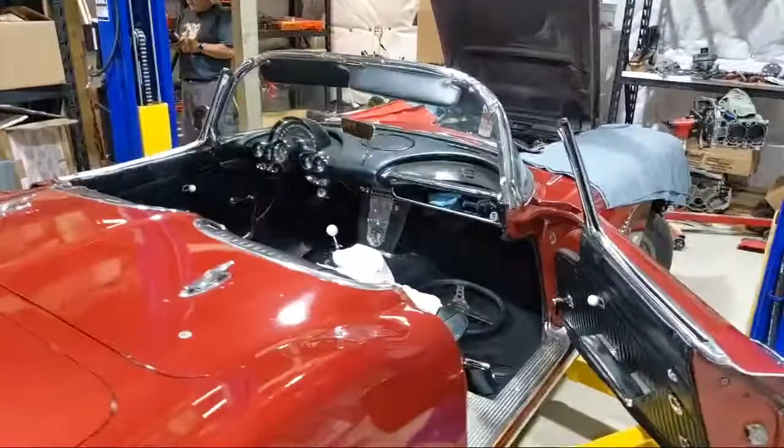So I got my dad's '62 Corvette here. I think it's actually technically his cousin's Corvette that he's been working on for a long time. It had been sitting in a garage for too long, and some people who worked on it before honestly didn't know what they were doing. So Dad's been trying to take good care of it.

It needs wheels and tires. Tires are new, but the old wheels from this era are pretty ugly. But I mean, that's just what they are, right? They're the magnesium ones, but they're fucking 14s. Look at these little 14s, teeny little guys.

So he sanded it down and repainted it, but it was his first time painting a car, so I think he did a pretty good job. He's got some dirt and stuff from doing it in his garage here and there, but overall it's pretty good.

It needs a little more wet sanding in some areas, but you should have seen it before—it's way better. Matt does all the body work, so Matt could help, especially with the finish work. It's got some greasy fingerprints on it from pushing it around.

Anyway, Dad did the interior, put new leather in the seats and the cards and all that stuff. He's worked on the cluster some because some of the stuff doesn't work. I don't think it's all quite right yet, but I know he's still working on that. I think there's the old dash-mounted mirror on these things.

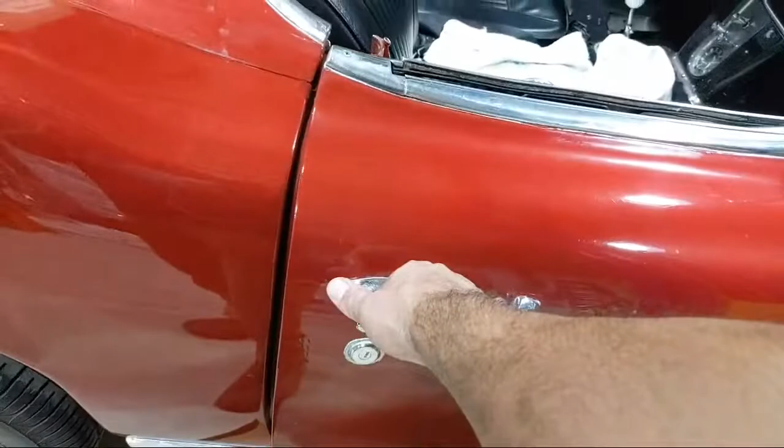Right there, it's really close to the exact points where the door is mounted, and even though the door closes, it still flexes so much that it won't shut. It has to actually get pushed down on it.

So the weight of the engine on the nose of this thing is bending the frame of the car in like a bow. Pretty interesting.

But let me tell you, that nice blue picture—there you go, how's that? How's the view, guys? The steering in these things is actually pretty freaking scary.

Or by somebody else that worked on it, but the lowest part of the car was the tie rods, and it was the lowest part of the car by a lot, and it was really scary.

Long, skinny, pencil-y tie rods that went to these skinniest little uprights, or hubs as some people call them, or spindles, and other terms.

Let me see if I can show you. Oh, look how skinny those things are. That's the spindle—look at that thing, it's so small. For comparison, here's my finger—I'm touching it. That's how small these uprights are.

Anyway, the tie rods were trailing, so we'll put this around here for you. It's pretty easy, no tie rods on it—that's the arm. Look how low this thing is. This is, and they put it on the bottom. I don't know if they did it wrong or if it's supposed to be on the bottom.

To measure the diameter of these holes and see if the taper was correct—judging by how hard it was to get out, it was either really, really wrong or it was freaking correct. But they hung from the bottom like this much further and went across the car. I can't see that being on purpose, but I've been wrong before.

It was the 50s when this was designed, right? This is a '62, so they were definitely working on it in the 50s. It's the last year of the C1, so again, the original engineering for this was done in the 50s.

Yeah, a lot of it's pretty scary, honestly. I'm surprised people didn't die in these things.

But look how long the lower control arm is—I think that's really cool, actually. The lower control arm is really long, and they mount really close to the center of the car. See that? And that's good for geometry. This thing technically has good parts in it for geometry.

The only issue with that is the upper arm is pretty short in relation to the lower arm. But if both arms could have been longer like this—look how long that is—obviously if the front arm were that long, it'd run into the engine almost.

This Corvette, being older, has most of the engine behind the front axle, not the front spindle here. That actually helps the weight distribution. See this one here? It looks even better, it's behind the front axle as well, better for weight distribution.

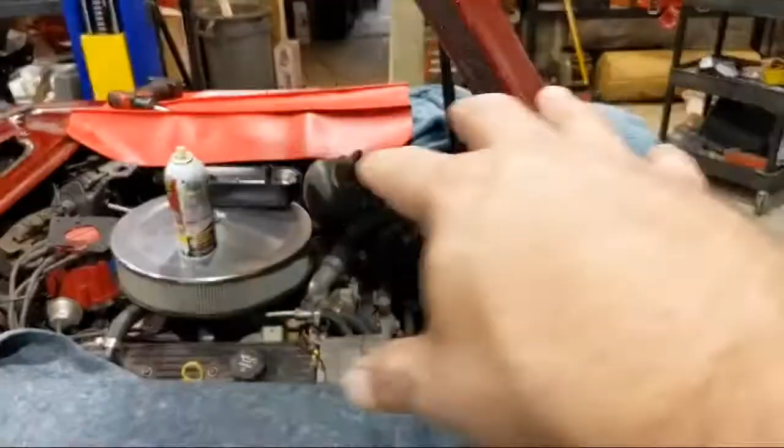I just had a conversation with a guy about Audis, how the entire engine in an Audi is in front of the front axle, and they're so bad. If you look at a 60-40 weight distribution, an S5, RS4, whatever, the entire engine's in front of the front axle. That's crazy.

Anyway, so what are we doing? We pulled all that crap out because we're putting power steering in it. The manual steering was, well, it was manual steering, right? This long ass setup is no good, a long shaft with a steering box on the end of it, and all those whack tie rods to the front end, like most manual steering cars, very difficult to turn in a parking lot.

Well, I'm half my dad, and he's got more muscles than I do. So if he had a hard time with it, then I don't know if it's something I would want to drive either.

Anyway, it's got a crate motor in it, a little small block crate motor. I think it's a 383 or something. Is that what you said? 350, it's just a 350. Oh okay, I thought you said it was something else. All right, so it's a little 350, no big deal.

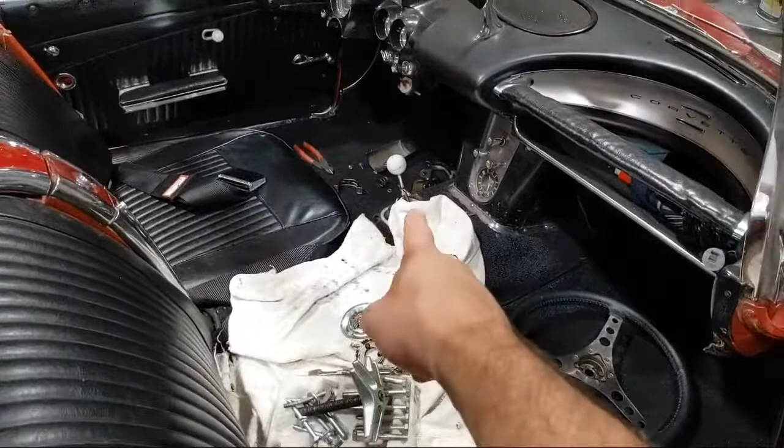It's mostly original though, obviously not that engine. But the transmission is the teeniest little transmission. The linkage actually broke off or unbolted itself from the side of the transmission, so thankfully he didn't drive it here. His original plan was to drive it here, and then as he was getting it in the trailer it started shifting funny. Then he got it out of the trailer and it got stuck in two gears at once, a forward gear and a backward gear, and then it only had five reverses. It was all whack. So we got it on the lift, picked it up, and looked underneath, and the linkage had completely come off the side of the transmission.

So fun. Anyway, what we're doing again is power steering this thing. Power steering, you've got a pump, lines, a new column, not a mile long either like the other one, and then a rack.

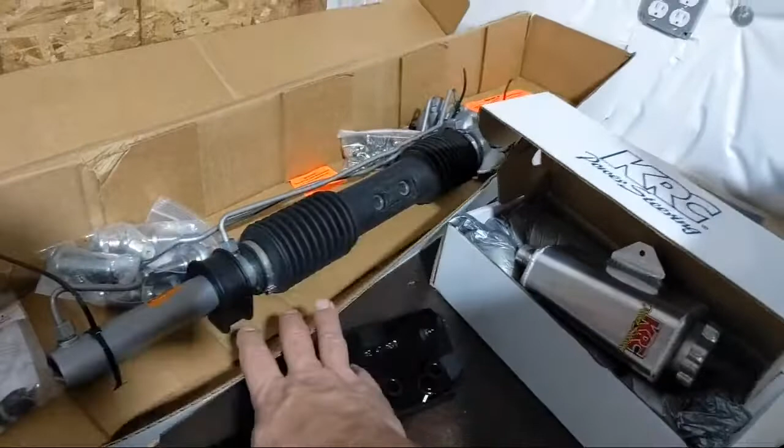This rack is interesting because it has similar geometry to the Corvette in that it uses center mounted tie rods, so the center of the rack actually goes back. What most people see in a rack and pinion, there's an inner tie rod and outer tie rod coming out of the end of it, which is what I totally expected when you said we're putting rack and pinion in it. But seeing those long control arms on the bottom makes sense now why we'd have the tie rods attached really close to the middle, so you don't get a lot of bump steer. If we had those long control arms and then short tie rods off of here, the bump steer would be tremendous. This actually helps it keep its alignment as the suspension travels. With a longer tie rod, you get less deflection, less length change over the suspension travel, than if it was really short.

And then you went like this, right? The length change would be more.

So, got all aluminum. Oh yeah, nice. Now what's that for? Oh, that's for the new tie rods. Yeah, these are the new tie rods. Right on, cool, very nice. And then that's the middles of them, and here's the ends of them.

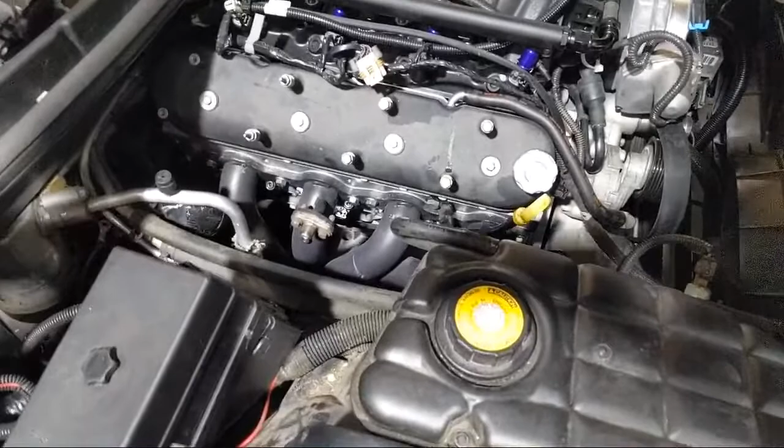Kooks headers, the FAST intake, CNC ported heads by Advanced Induction, 232 cc ports. I had to go with head studs.

I wanted to use bolts. This thing, I didn't plan on this seeing boost because it's like 11:1 compression now, so I had no plans of boost on it. So I just wanted to use regular ARP bolts, and I ordered the second to last set of bolts in existence. And then FedEx lost my package.

FedEx fashion, they lost my fucking package. So a week later I'm like, well, I need bolts, where's my shit? And they're like, we don't know. So I overnighted the last set of bolts in existence until September, and then they got here and they were the wrong bolts.

My fault though, I ordered the wrong ones. I went on the ARP site, looked at the part number, and it was for the right stuff. I put the part number into my distributor's system, hit order. Apparently I transposed something, or the ARP site's wrong. I hadn't even checked because at that point it was like, whatever.

So I had a set of head studs here for the 6-bolt LSX block, so it has all the extra bolts and stuff. This head stud kit has way too many studs in it, and I didn't want to use it for that reason. I wanted to save it for an LSX block, or sell it, or something.

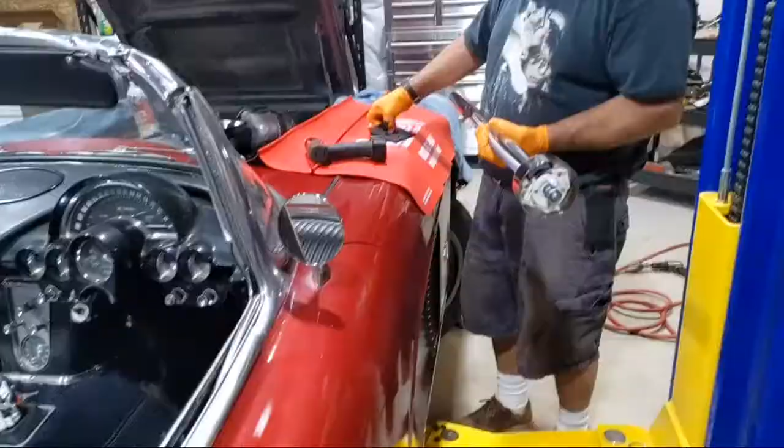Is this gonna have some blinker switches? Yeah, the switch is right here, that's the switch mechanism, and the arm's in the bag. You screw inside this hole right here into the thing. One of the holes. So the wires theoretically are already hooked up? Okay, so I'm gonna have to come in this way with this. Correct, but it's short enough now that we can do that. And this plate is gonna be on this side I think, like so, with this tab, I think, down or up. I'm not sure, it'd be down because of the angle, right? It's gonna come out at an angle, so I can go ahead and slide this through without this being in place yet. I'll put this in. We'll use all the free play we can.

You just gonna do it like that? Okay so it doesn't go in that far does it? A little further than that, but yeah, not very far. It can't, look at it. Is it already there? Yeah, oh yeah, that's it, there you go. So the rest is all those linkages that they gave us.

I sure love the lines of the C5. I'm sorry, a lot of you guys hate the C5, I freaking love the lines. That booty, like the side, the transition, just how smooth it is, it's like a timeless line. I wish this wasn't so fucking zoomed in. I feel like the C6 already looks more dated than the C5s, that's just the way I feel. I think the C7's obviously shit, and the C8, but I feel like the C6 looks more dated than the C5s. I don't know, maybe just my bias showing.

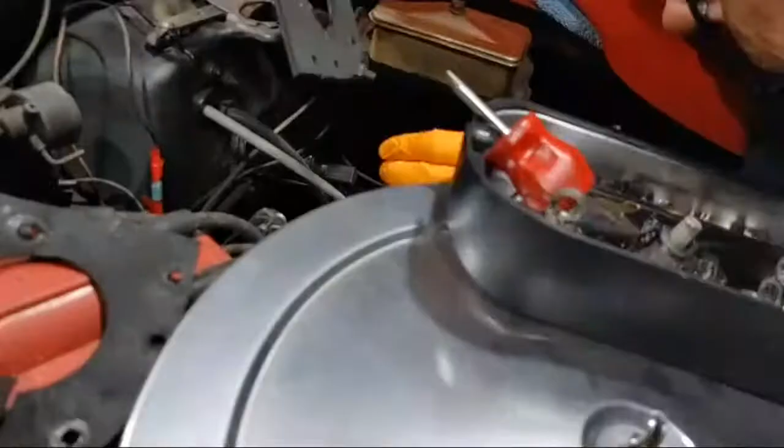How far does it come out? Oh yeah, not that far at all does it? No. Trying to figure out how this thing sits in there. Rack is angled down, do you think this comes out? It has to, yeah, because there's a hose clamp that goes on there on this side to hold it in place. A hose clamp that goes on this side? Yeah, right here, goes around this and clamps the rack to that, holds it on this side. Okay, so we're looking at this thing going in here. Yep.

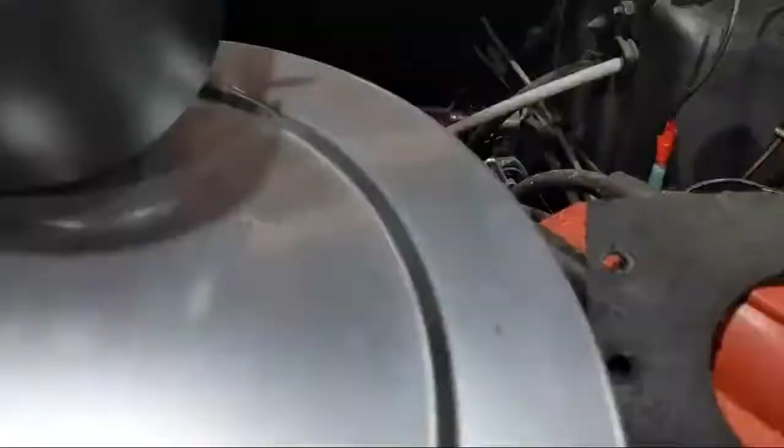All right, so now we are going to put the car in the air so that we can get all the lower stuff attached. Then once we do that, we're going to make the rods that connect that spline section to the spline section of the steering rack. So up we go.

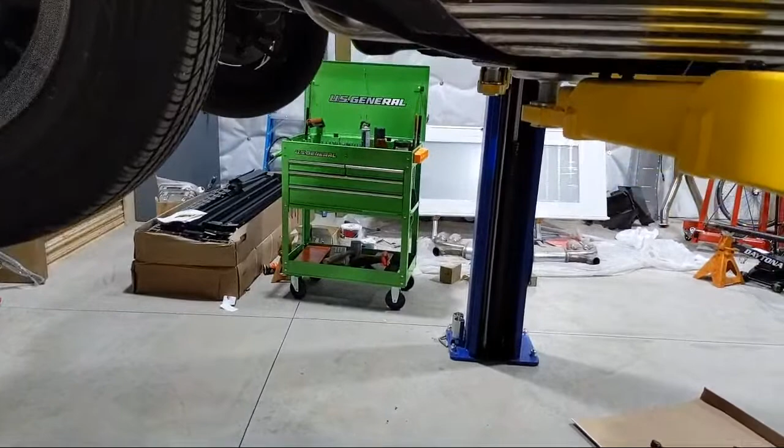I feel like this could be faster. I mean, it's a 10K lift. It's made for big ass trucks. It's super wide, way wider than this poor little car.

I like it. Yeah, I do too. Coming down, hold on, I got locks. I don't like blowing seals out in my hydraulic rod, so I don't like holding a lot of hydraulic pressure on the car when you put it in the air. A lot of people don't do that.

So let me show you the bottom of this car real quick. Old ass 8-inch. Weird X-braced frame, I guess that's a 50s thing. That thing is so weird. And the exhaust goes through it. Like, how strong is this beam with a giant hole cut in it?

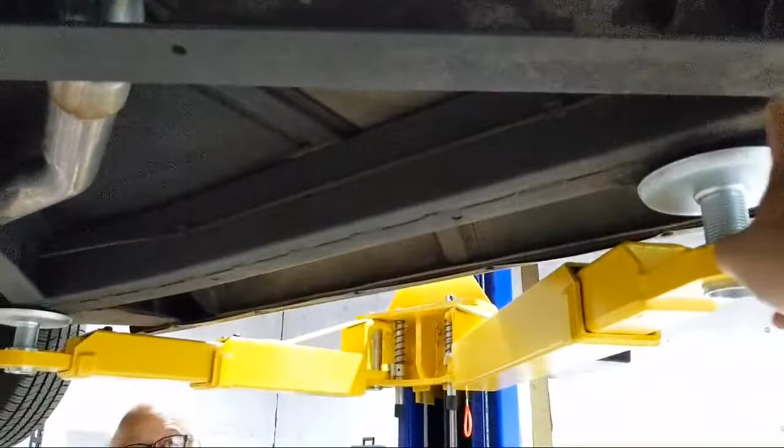I don't know how strong that is anymore. Is that why it's flexing so much when it's on here? But that's the way they have it, big old holes in there for the exhaust to go through. But here's the main structural member. Maybe this is just to support the floor of the car, and that's why they get away with this big old hole, it helps support the floor and the rest of the body. I'm not sure, I'm not the engineer on the team.

Look how tiny this transmission is. Let's see if I can zoom out enough here. This little teeny transmission, here's my hand, literally here's my hand on the bottom of the tranny. But it's mighty. That's the output shaft. And that's the freaking front of the bell housing. But mighty, that's it.

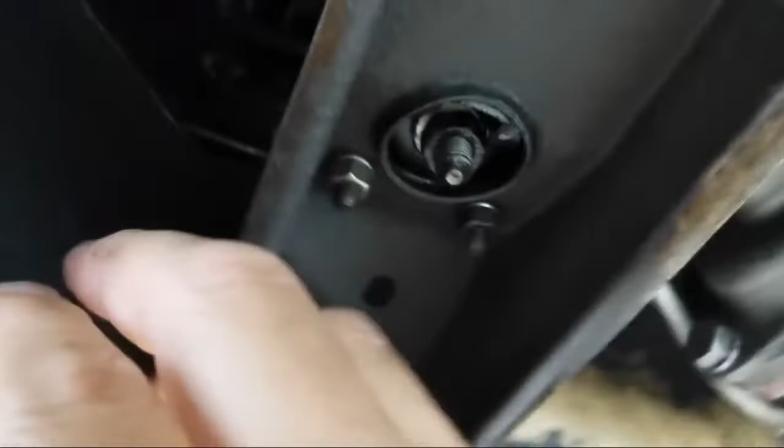And then the linkage here. I've never seen linkage with so many freaking bars and rods. Let's see if I can get an angle on this. This is comically... you see it inside there? I don't know if you can see, but there's just so many bars and rods in this linkage. Let's see, oh here we go, right here. Look at all this stuff.

All these, and it broke. If you look here, you can see, they're not supposed to do that. So he had five reverses for a while. Interesting is this plate right here. I wonder, has this tranny been apart and someone put the stronger mid plate in them? Was this an upgraded mid plate that mounts all the gear shafts on these? So I wonder if this has been apart and they upgraded the mid plate. I think the guy used to drag the car because he got a huge ring and pinion in it. Did he? Top speed, 4th gear on the freeway was like 50 unless you took it up to 8,000.

This bell housing's broken too. Yeah, it blew up, it blew this shit up. Look at that, it's been welded together. This bottom is all, like, it scattered a flywheel at one point in its life. And they welded this thing back together. There's a big old weld around here, all the way up top. So that thing scattered a flywheel at some point. That's scary, I'm surprised it didn't go through the freaking bottom of the car.

Honestly, so here's the bottom of the car again. The tie rods were mounted here, and they went all the way up to here. They're really, really long. Now the rack's going to go here, and they're still going to attach and go back and forth in the middle. So it's still going to be really long. But they're not going to be the lowest part because the rack is going to be in the middle of it, so it's going to be interesting.

Oh, I heard the pheasant. Yeah, that's what it was.

I heard him, yep. This is our radiator support right now, because the bracket that the steering bolts to is also the support for the radiator, which is also the mount for the hood. The hood mounts to this beam at the top, which is really interesting. So we had to put this in here just to hold it while we undid all this shit, put that together again, so the hood stays like it's supposed to.

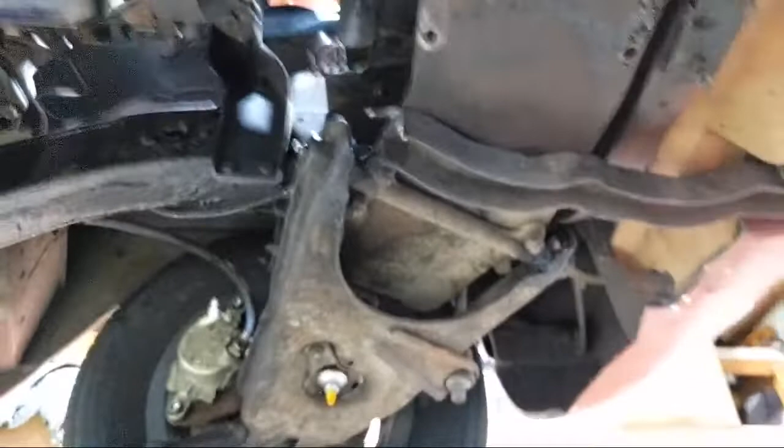Also, look at the angle on these control arms. Not only are they long, but they're angled. That's a good 25 degrees off the center line. Look at that. That's some interesting geometry. It looks like it has forward caster.

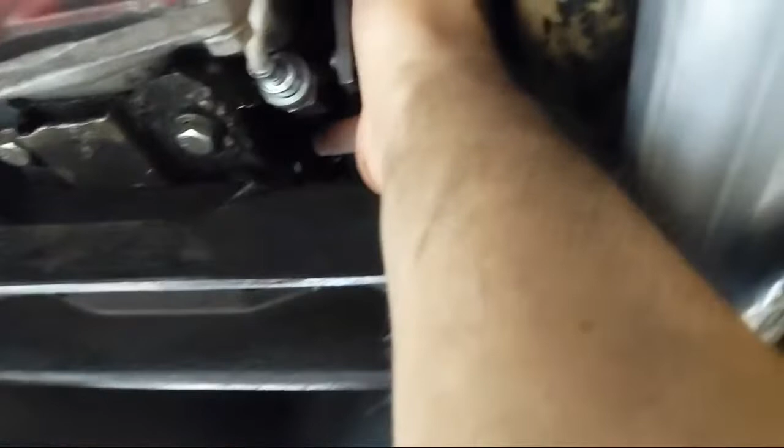Good thing I didn't try to drive it here. That just happened, just came loose last minute. So I couldn't drive the car, it was like stuck in forward and reverse. Fortunately I didn't do anything but turn it off. Yeah, we had to clutch in to push it in.

Anyway, this is where all the stuff was right here. That your rack and pinion is going to go right across here. See your tie rod.

I'm with it, so dad put different gears in it, for a little more highway mileage. No, it's my dad's.

Yeah, they go for a lot of money, they're worth a bunch. I honestly don't know why. I wouldn't want one of these things, but I'm not that nostalgic about shit, so maybe that's why.

I don't know, what's with the strap? The rear end strap, like it's broken. Yeah, there's two of those, it's almost like a limiter, as to how far the rear end should go down. Yeah, it's a droop stop. But they'd be broken.

Think the old, is this for the tie rod? What's this for, the old exhaust used to be out here, right, on the outside, it was weird. The old exhaust used to come out here I think, that's where it used to be mounted. It was ugly as shit, so they did this, they put this exhaust on it.

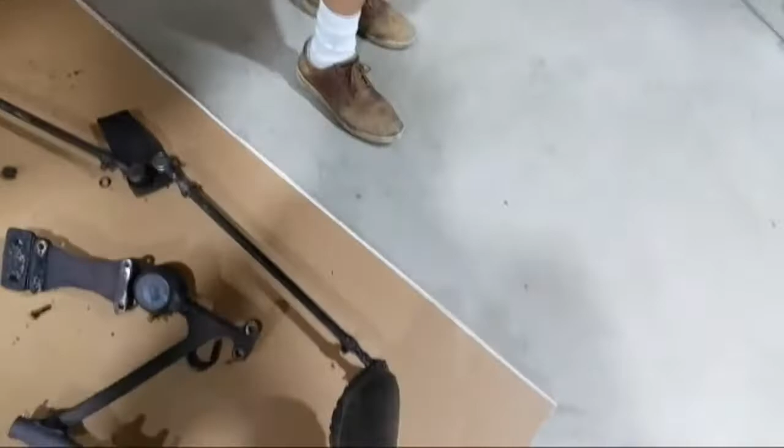No, no New Balances, leather shoes. Although my dad is wearing cargo shorts, but no New Balances. Although there was a period of time in my life where New Balance was the only shoe I'd buy. Now I buy the fuck out of Merrell's because I like Merrell's, they're really comfortable and they're light. I love Merrell's man, like they're so freaking light. These are comfy and light man, really good. They're Asics, but I have one set of black New Balances, just for S&Gs.

There's room in here, just this fender well is gigantic.

My shaft mounted rockers for my Corvette. Once again, push rods, I can put those in.

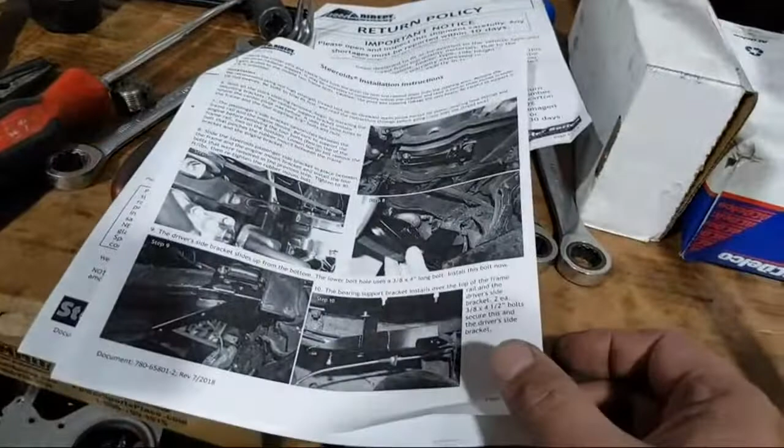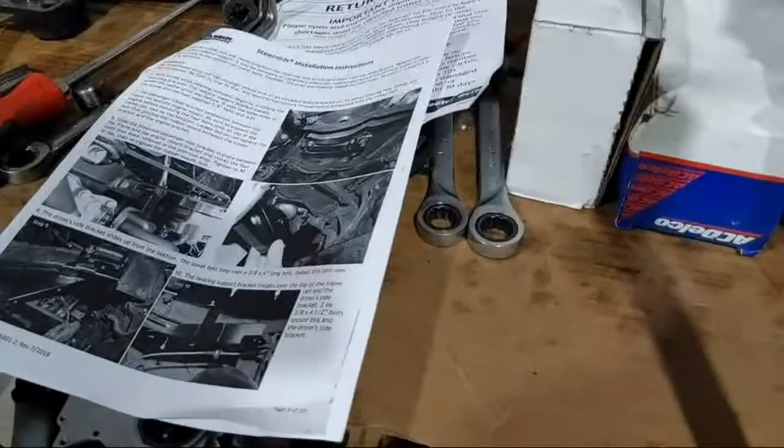Install the mounting brackets, it just says all of them, so use the center one. We'll do the middle one first, the radiator support, and then we'll move to the driver's side outer and passenger side outer brackets. So this one first? Yep, that one first. Yeah, do we get nuts with it and bolts, or we use I don't know, bolts?

LT1 Caprice wagon, the LT1 was a sweet motor, it was reverse cooled too, so they did really good.

There's a bag of bolts here, hey look at that, that looks promising. It was reverse cooled, which is pretty sweet, but...

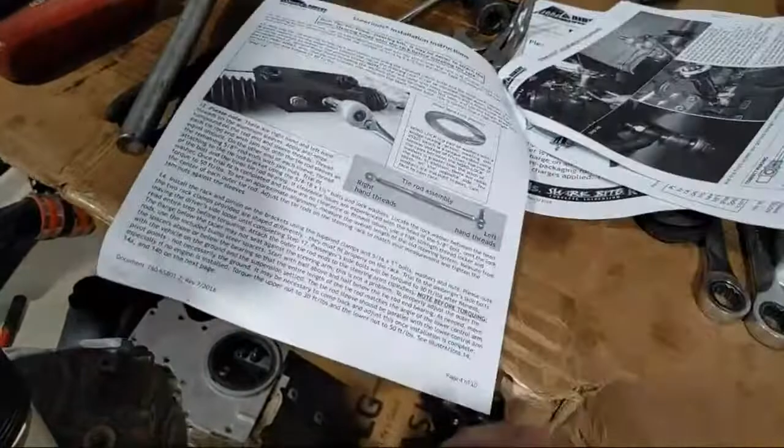They got sued over it. GM got sued over the LT1 being reverse cooled because Evans owned the patent for reverse cooling. While I don't think they came up with it, I think they were just the ones that freaking patented it first. And so the LS1 didn't get reverse cooled. I know in a previous video a few years ago I said the LS1 was also reverse cooled, and it's not, it's not reverse cooled.

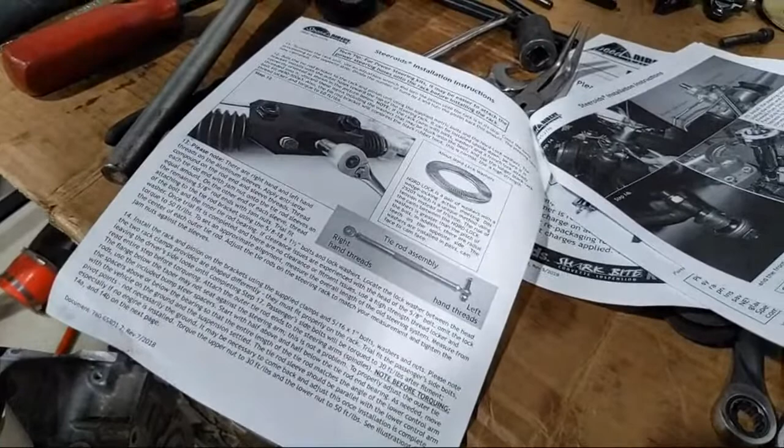I wish it was, and I want to put an electric water pump on the car and make it reverse cooled on my own. Evans can't stop me from doing that because I'm not selling shit. So I just need to make an idler setup for the accessory belt. Some companies have them, but the electric pump is mounted under the idler, and you can't change the water flow direction like that.

So the pump with an idler setup, and then make it reverse cooled. You can get a lot of extra HPs out of reverse cooling. Way more efficient and everything else. Well, fuel economy gets hurt a little bit by it, but the power goes up dramatically.

What's up, Dan? We got issues. How do we have issues?

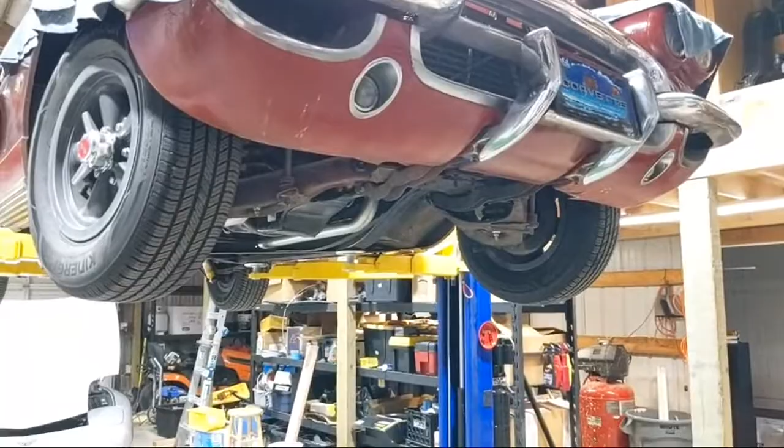I think this thing requires a nut, lock washer, right? So what would be the right size? I'm gonna go this route here. 1, 2. Well, let me see if we have any instructions that tell us. Fasteners. Okay, yeah, so this is fasteners. That's sweet.

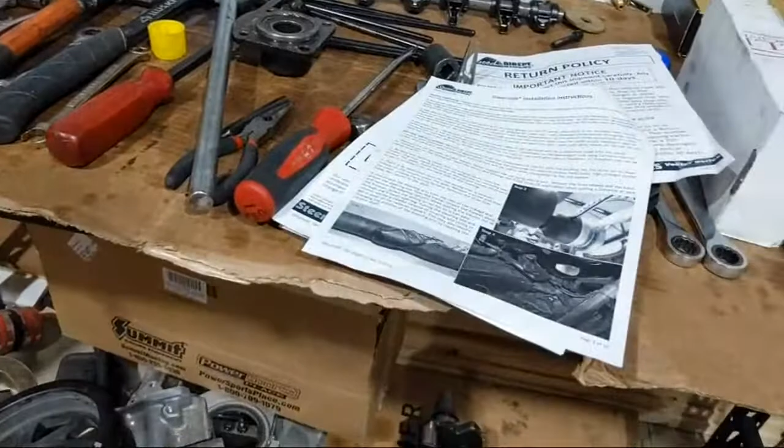My CTSV. No, I didn't reverse cool the CTSV. I wish I did, but I did not. I built a motor for it. Unfortunately, I stroked it, and I'll never do that again. Not without going to a super tall deck block or something, but I got such a good deal on the stroker kit that I did it.

Anyway, I need to rebuild it anyways, and man, they gave me a stupid good deal on it. They gave me like employee pricing, and so I bought the whole thing from them. I think I got like crank, rods, and pistons for maybe $1,800 or something. A 4-inch stroker crank, and I don't remember what it was. It was something ridiculously good. And that was what, 2012 or 11, something like that.

And so I built it, stroked it, put a blower on it, and that thing was pretty mean. It did a good job. I really liked the Kelford cam that was in it too. It wasn't their blower cam, which is what I actually had in my C5. I had the Kelford blower cam in it, the SS108C. Had I had that in the CTSV, it probably would have been even more mean. That was a really good cam. Actually, I enjoyed it. But the one in the CTSV was the SS108A, which is their first entry level street cam, which is still a sweet cam. I really enjoyed it. But the cam I have now in that thing is stupid large.

304 degrees of duration. So, yeah, it's going to sound retarded. It's going to sound so retarded.

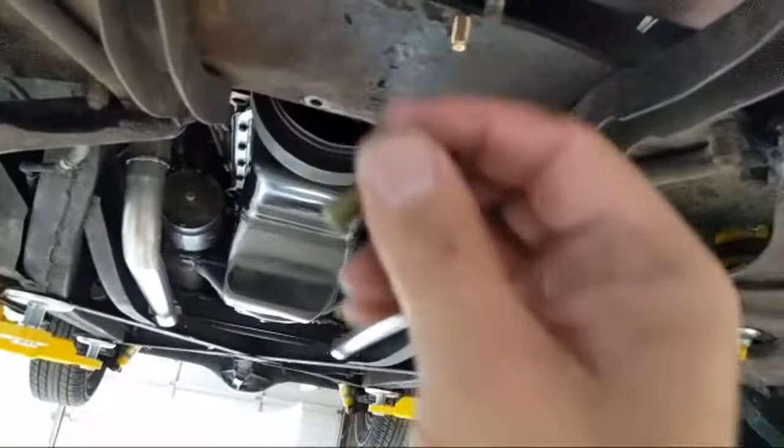Yes, this is dropped. This is dropped down from the top of the frames. Yeah. So yeah, put this guy in here. Are they requiring flat washers on top, or the flat washers going on the bottom? I would say probably on the bottom. Usually with the nuts. Okay, because the nuts are lock nuts, and this is thinner, so I would assume the same thing. Yeah, this is double layer steel. Yeah. I don't even think the factory ones had washers on them either.

We need to get the pry bar back out and raise this thing again. Ah, I can't reach in here. Especially not with just one hand.

You get it? I'm trying. Almost. Come on, fingers. Yeah, that's how my wife likes me. Oops, I dropped it. Premature. Got it. Premature. Yeah. Why the wife hates me.

Other way. This one? Yeah, there's two, oh, four in front, didn't see two in this. Yeah. There was another spacer on there, but it doesn't look like I need it, huh? We just want it flat, right? There you go. Now should that spacer stay in there, or should that spacer come out? Oh, yeah, see now, when we drop that radiator, it's gonna come down. We got the radiator raised right now. Yeah.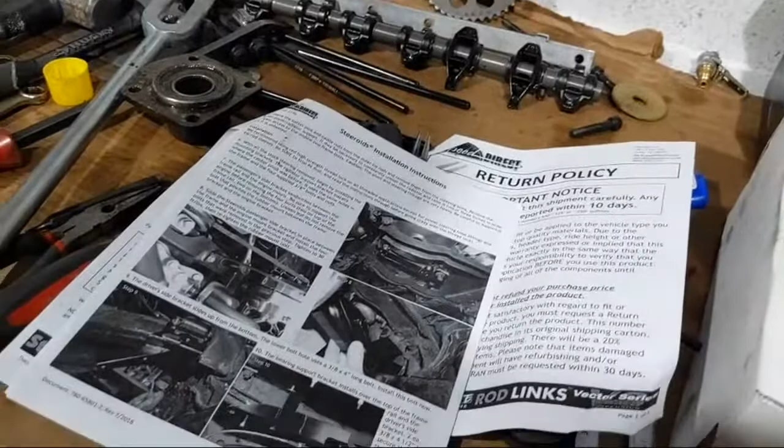Or the radiator? Yeah, I don't know why they would do that. That'd be potentially detrimental, I would think. You think there'd be some pad? See, there's some more, this is what I'm talking about. Look, here's the other part of the pad right there. There was actually more pad in it. Where? Right there. Oh, probably should add more to it then.

Oh no, it was pad, bracket, pad, clamp. Right, the pad was on the bottom. Right, so that way it could go up and down. Right, so we'll put the pad back on the bottom and use the clamp piece which is over there.

Unless I see different here in the directions. I'm looking right now. This here, this is what you're talking about? Mm-hmm.

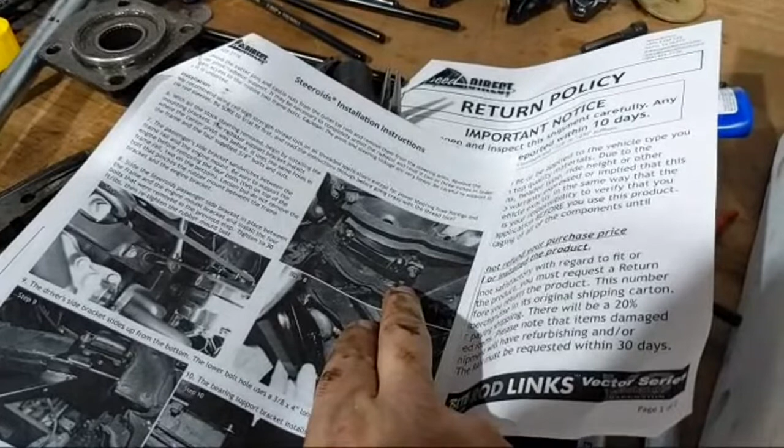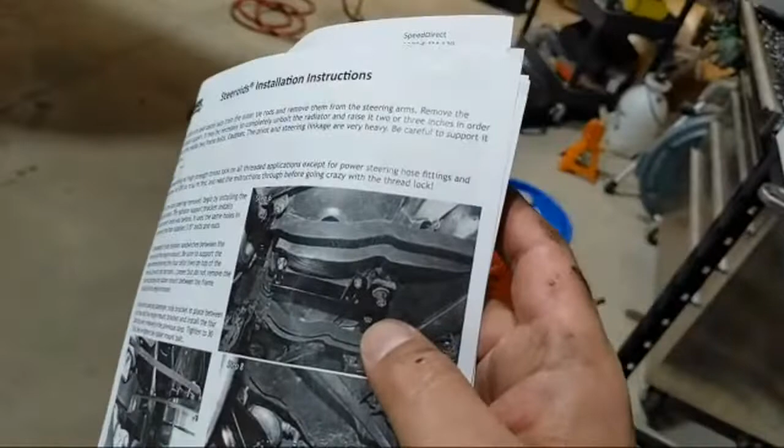Didn't say anything about it. But I don't see anything below it on the picture. There's no pad below it, it's all on top. Yeah, that's what I'm talking about. But the thing is, the big bracket that was on there was kind of shaped differently. See, look Tom, look the way it was shaped.

Yeah, this one's like that too. It's got to drop out. This one's got to drop. Oh, I see, there is a little bit of a drop. Yeah, there, so I need to put that second pad in. Probably.

But if we do that, the radiator's going to stay up at the height it is. It's not going to come down at all. Well, it's not that far down below where it should be right now. I only picked it up a little bit, and this rubber pad is going to compress.

Okay, so I will put the pad on. What's this? That was just... this is a bolt thread lock. Oh, this is for the back one actually. That was what they used to lock the bolts in place.

We won't need that pad. Remember I bent those out of the way to undo the bolts in the back here?

Okay, so... hang on to this, it's just going to fall. I don't have any more bolts on it. Okay, it fell.

Look at that piece of shit. Just looks like a chunk of tire rubber. There's steel on it right there though. Okay, and this was not.

Are we sure this is the right spot, or was this around the steer housing? Are we in the right spot? I have no idea. Let's see. It looks like it. No.

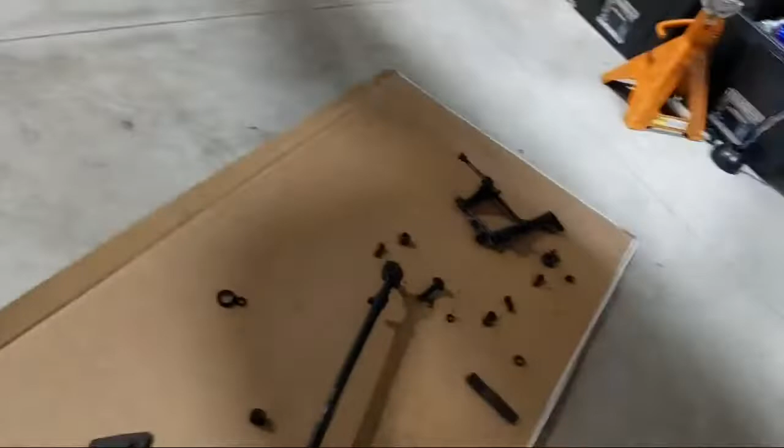We're not going to use it. Right, all right, that makes sense. This radiator's got to come down a little bit, which would bring it down on that cutaway.

Actually, I think it went right here. I think on that one. Because this looks like it's got some shit on it, might have been in there. Schmutz. Yeah, I don't think it's smooth, well, I guess. Yeah, we can shift the radiator afterwards.

Oh, these are lock nuts. Mm-hmm. It's a lot of bolt.

It shows a spacer on here, on these front ones. There was a spacer on. There's spacers included in this kit.

Interesting. Is this not this guy? No. Oh, this guy on too.

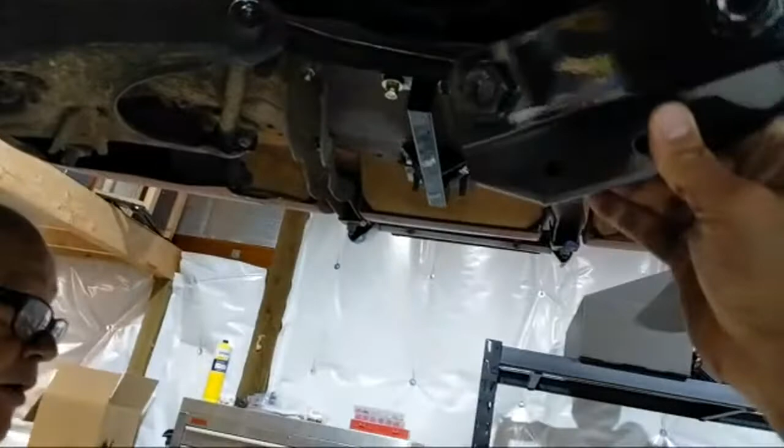Where does that go? Yeah. Well, I don't think this mounts on top of that unit that we took on here. You don't think it goes on top of that, do you? No, definitely doesn't. The picture shows it's going on. Yeah, picture shows it goes right there by itself.

Is that up? That might be like for mounting. It's for the rack, they show it on the rack, but they don't have the rack.

Oh, here we go. The fuck is that? The engine? Under the oil pan? What?

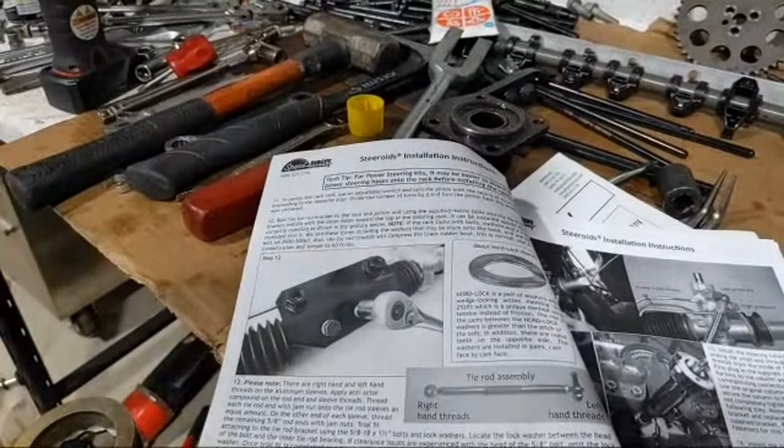Oh, that's what the tie rods mount to. Now I see it. So that's the plate the tie rods mount to from the rack, and the rack mounts to the big brackets we're going to put on in a little while. And that plate you're putting on right now is just the radiator support to keep the radiator in place since we took that out as part of the old steering stuff.

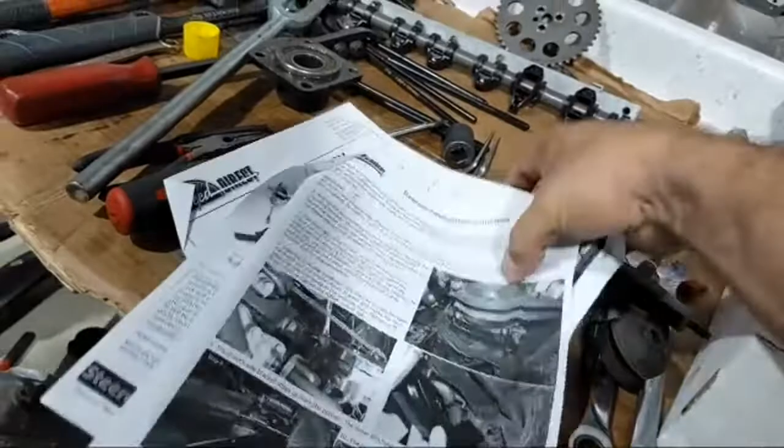Okay, so should I go ahead and tighten these? Yeah, I would. We need to figure out the spacer thing because it shows in the picture there's a spacer. It's a long bolt, right? It shows a spacer on it. Yeah, because there's a bunch of shoulder that's not being used anymore on that bolt coming out of the mount. Yeah, there is a spacer, but we already got it on there.

What? It's showing this spacer right here. There's a nut. I don't see a spacer. I see a washer. Well, then it's a really weird washer that's a half inch long. I don't see a spacer. Okay, well, see this shoulder? I know what you're talking about. See how there's no threads right here? There's no threads right there. So it's going to take up the space where there's no threads.

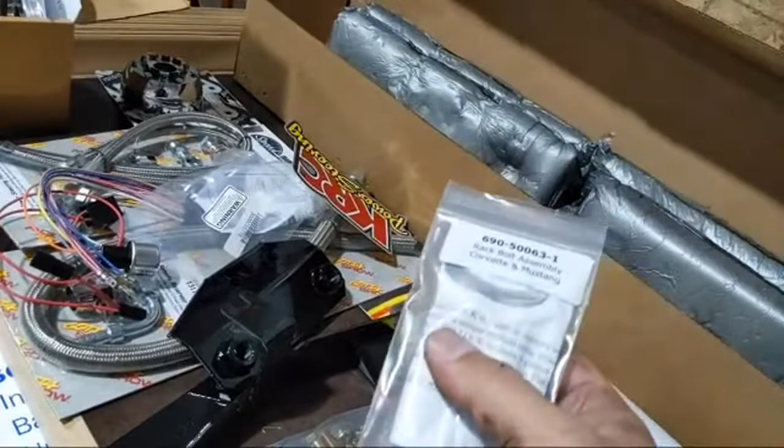Well, the threads are there. It's just rusted out. No, it's not that. You can look at it and see it's a tube. It's a freaking tube, Dad! You can look at it. Well, there's no spacer in the kit. We're just going to have to tighten it up. Unless it's inside one of these baggies. Ain't that right? Nothing here?

So what you're thinking is that spacer gives the radiator more room to move. No. Okay, then what's the spacer for? The spacer is what clamps the sprocket, because the thread, the nut shows it on the picture, shows you on here. And then between that, there's something to make up the difference. Oh yeah, fuck that, yeah, the threads go all the way up. They just hadn't been used. I can see them. All right.

Looks like it's a stud, but we're not going to tighten that up until the end. It's going to be the last thing, we need a spacer on it or washers, we will. But until then, let me tighten those up. Those are half inch, nine-sixteenths. They're probably metric, I don't know, I mean it's for a Corvette. I mean, they're fine.

Look at that pheasant out there, just really going at it.

No, they're close. Here you go. Here you go, just that guy. All right, let's start with this one. You gonna tighten it? This wrench isn't going to get it, I think it's nine-sixteenths on the top side. Yes, go.

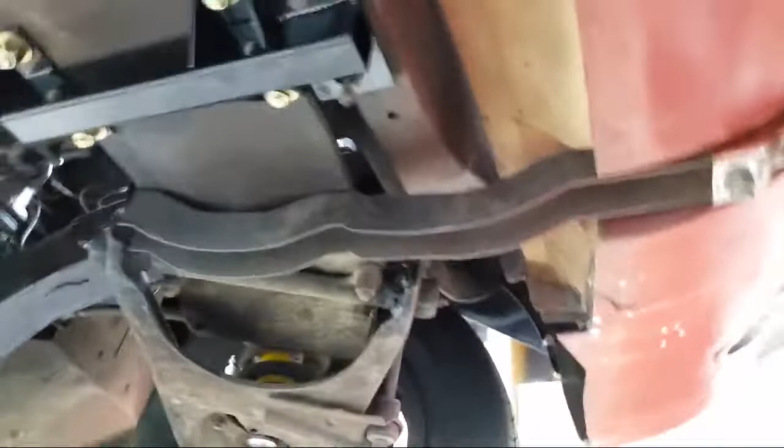All right, now, yep, now what's next? Well, we can release the hammer so that this can come back down on its mount. Okay, we can do that. We got those mounts up top. Yeah, at some point you gotta put those back again, and then the side ones. Here, let me just do it with the pry bar right there, so that we can.

Okay, and then we get the flashlight and see how close those bolts are, because those bolts will give us absolute height, right? They'll tell us the holes.

What do we got? Oh shit! You need to tell me, we might have to take that whole bracket back off again. Why do we have to do that? Because how is she gonna get that shim in there? Is she gonna cut it and slide it in?

Yeah, you're right, those are the right height. Is this a bolt right here? We got a bolt hole right here. Yeah, I just can't see in there, there's so much fuzz. I don't know if it's tipped forward or back. There we go, it's pretty close. Oh yeah, move it around a little bit. Yeah, there we go, about here-ish on this side. You got it in? Well, I just used a punch to wiggle and feel the hole.

To start a bolt, where are they at? Side? The bolts for that? They were here, and then you moved them somewhere.

No, those I did not move. I think these things, you were counting them, and you said we got 3, and then we got 4. Is that these here on the ground? Could be, though. No, these are the fine ones. Oh, the ones in the tray.

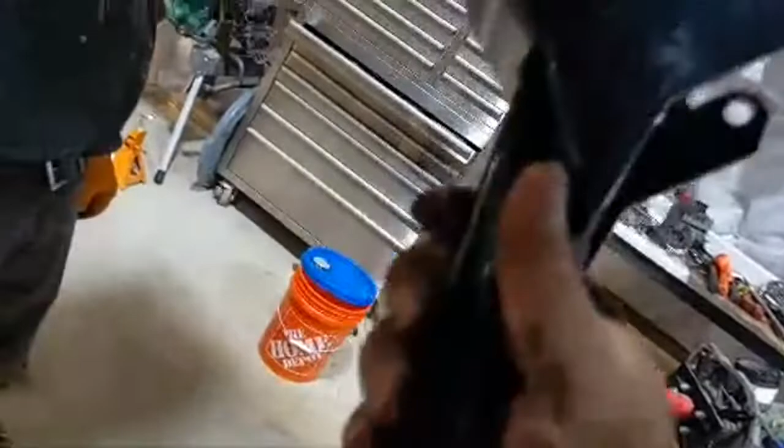Oh, here's a coarse one. There's a full... here's bracket, a coarse one. I bet there are those 2 right there. Well, there's 4 of them, and then before the same ones. Yeah, but there was 2 we took off on the top, 2 we took off on the side, right? No, there was 2 on each side, 2 on the back here, and 1 on the back right there. 1 right there, right? 2 right there. Yeah, 1 on each side. 2 on both sides. I can't reach it anyway.

I know you can't. I'll put this right here. Okay, now this bracket, is that where that goes? Sure looks like it. This brake line's kind of weird. Right there, get up in there.

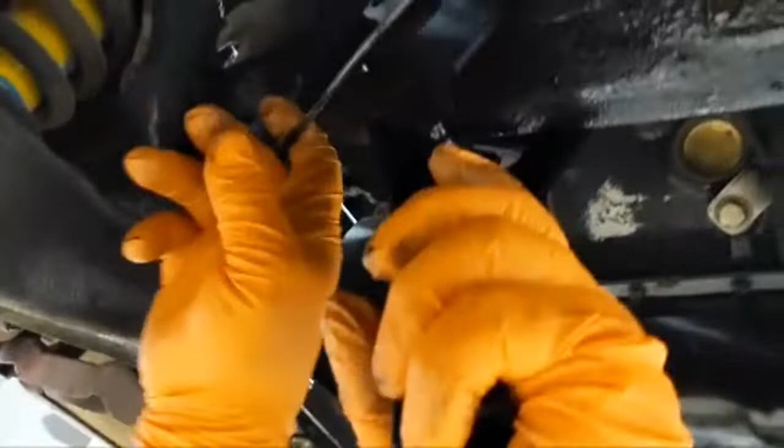See it forward. Okay, let me do it. How's it hitting? What are we getting? That's what I just asked you. I asked you first. I can't. There's something. Yeah, there's a burr right there. It's like welding nubs, so you gotta go further. There you go. Yeah, okay.

Look at that. That's what the long ones go to. All right, back to the long ones. 3 long ones, right? Yeah, there's a hole there. Just the same one that held the rack.

Okay, we saw them. I don't know if it matters how the nuts run. Nope, probably wouldn't matter. Okay, there you go. I'll get the nuts.

Is there a bracket on this? You got like an inch and a half of bolt sticking out. Maybe. I wonder if something else goes on there, like the steer box or something. Support to the side. Yeah, it might be a steer box. Let's find out.

Well, there's no steering box anymore. It's a rack, right? Bearing brace bracket, passenger side, driver side. Okay, so potentially the bearing brace bracket. Where's that go? Bearing brace bracket, might bolt to the other side of that guy.

These are not the best instructions. That is driver's side. That's the other guy, that's the one we did already. Try it again. All steering locks removed. Did that.

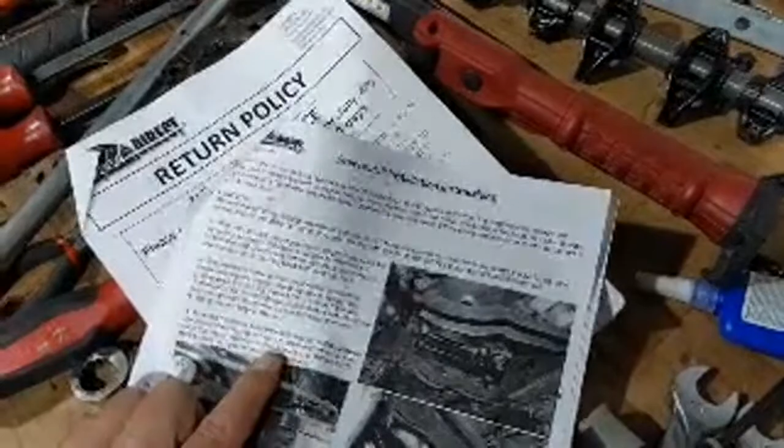Passenger bracket sandwiches between the frame rail and the engine mount. Oh no, the engine mount. So you gotta pull the engine mount on the for the passenger side. What do you mean, engine mount? That's what it says. No, it does not go there. It goes right where it is, passenger side.

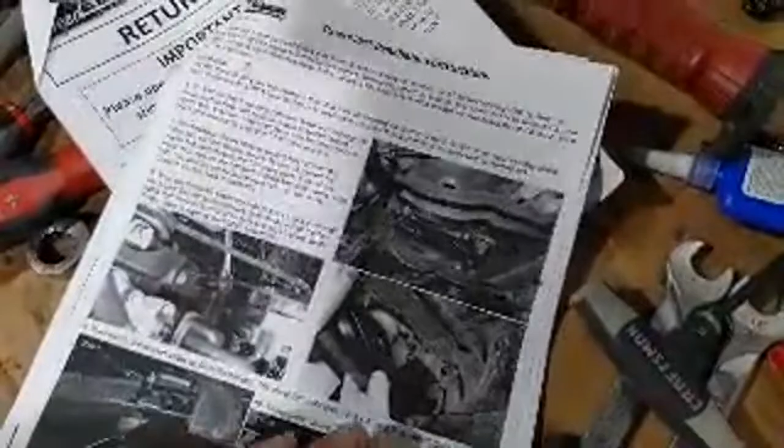What goes over here? The passenger side bracket. Here we go. The bearing support bracket installs over the top of the frame rail and the driver's side bracket. Over the top. So we got this thing on upside down? Why would you think that? It says over the top. The bearing bracket, Dad. Okay.

I don't know where the bearing is. Where's the bearing? The bearing supports, the bearings are the ones that hold the shafts. Okay, those two shafts that you got to put together. So you're talking this bracket here? And this bracket here? One of those. Now this.

The bearing support bracket has a round hole in it. You got your hand? A big round hole in it? That one's got a big round hole. No, that's passenger side bracket, that's the one that goes between the motor mount. Okay, this one here is the bearing bracket. Okay, it says this goes on top.

So like this. On where we are at? Yes, so those two bolt holes. Looks like it goes on the top too, yeah.

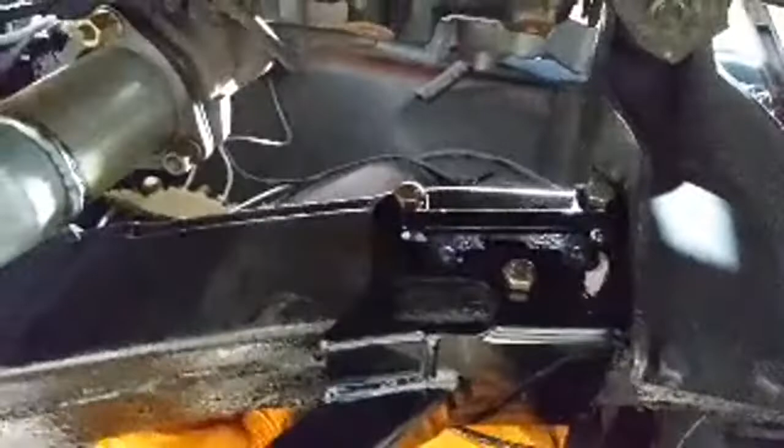Okay, push that bolt in. That top side, right. Front one or back one? Both of them, push. Okay, wait a minute, wait a minute. Go back out, back out a little bit more, right there. Okay, go ahead, push that one in. Okay, now the other one. See if you could push that one.

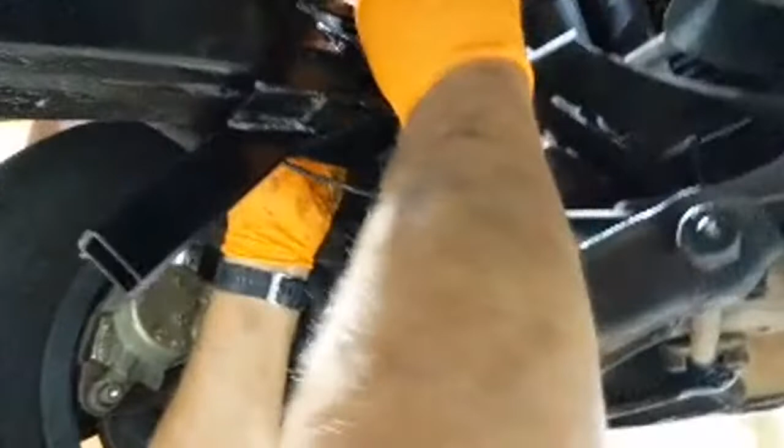This thing still has to come down, okay, over the rail and over the bracket. It's not all the way in. No, this one here. Okay, what now? Seems like a big gap. You see? I can't see that way.

What are we talking about? Right here, this forked section. Oh, there's nothing. Oh, I thought this. So this has got to come out, right? And then it kind of goes right over the...

It says it goes over the top of the bracket. Yeah, okay, that's over the top of the bracket there. Like that? Yeah, something like that.

Just back a teeny bit and it should line it up. Let's see, it seems weird though, the way that bearing support is at. It's at a funny angle. How far off am I? It has to go back about a quarter inch.

There's the hole. It still seems weird though, it's not like how that bearing support is up there. Oh, I remember now, okay, that makes sense. Yeah, there you go, just a smidge too far. Just go back, just forward a teeny bit more. There you go.

This bracket? Mm-hmm. Forward, here, I can see it. Right there. Okay, let me see what we got here. Okay, see if you can find the hole here. Not even close.

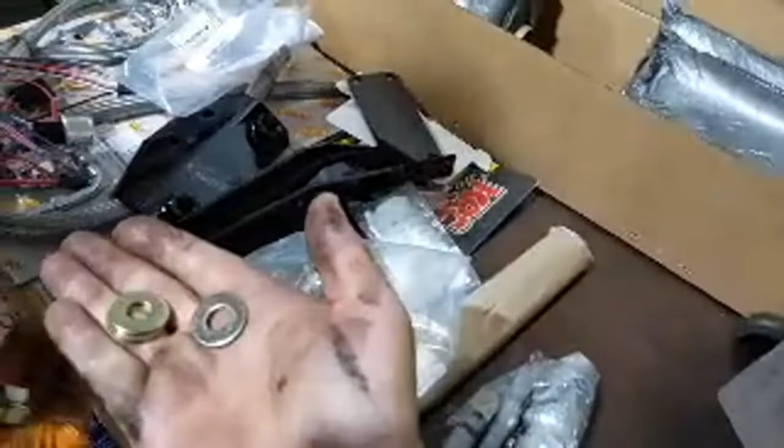1, 2, 3, that one's... let's see, yeah, they're all right. They're all the same, so they're not to the right side.

So would we have put the washer on this side? It says according to the picture, it goes on the nut side. Okay, it just shows the nuts on the inside of the car, but I don't think it matters. Depends on what you want to see. When you're looking down, do you want to see the nuts or do you want to see the heads?

Well, the only reason I'm mentioning that is because of the fork. Do you need the washer to take up more of that to cover that fork side? Oh yeah, that's possible, yeah, let's try it. Flip it around. Well, that was easy. That's an astute observation and conclusion.

Is one of these longer than the other, or are they all the same length? Because that one looks short. I think that's the bottom one. Okay, is that one shorter than the other two, or are these all the same length? Oh, definitely, no, it is shorter.

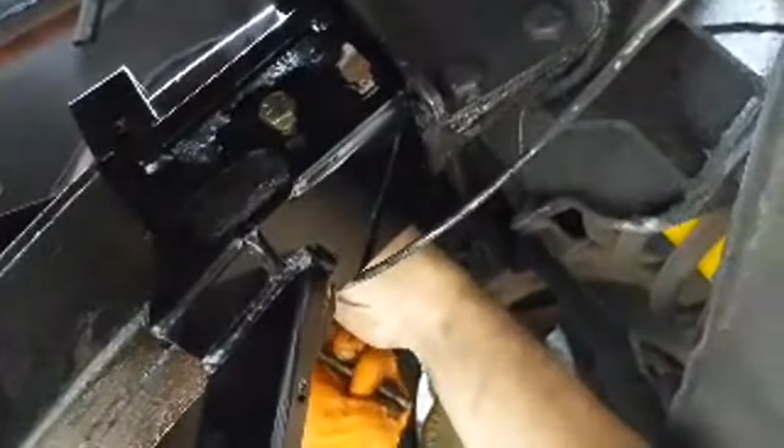It was a washer. Don't know why it fell, but it fell. That's pretty long, what's that short one? This one long enough? Yeah, it's longer. All right, I just saw it.

Here, now interestingly enough, this frame rail is so close, that washer will fit right there. Right here, top one, I don't think it'll fit between those two. It's really tight. Yeah, it fits, barely. Just barely?

Yeah, just got to love on it. Gonna pull it back, see if it fits in there. There you go, forward, forward, down, down, down. Then forward a little bit. There you go, here we go. We got it, teamwork. Oh, teamwork, that's nice to see.

That's Adam Sandler, from the Goat skit. Goat!

So the part is going to go into the motor mount. That's not going to be fun. Huh? And the motor mount, it says this sandwiches between the two of them. We have to undo all four bolts, support the engine, and jam this in there. Right, okay, makes sense. And then it hangs down. That makes sense. Yeah, it's like, is there room for this much?

I don't know, but let's tighten these up. Okay, they don't have anything to do with the motor mount. Okay, what should I use? 14 again? Yeah, I think so. All right, are we gonna be able to get in there? You do the nuts, I'll do the heads. Bottom.

Oh yeah, back one, back one. Oh, you want to do that one again? Which one do you want to do? Back one, that's the front one. Back, but that's top. Okay, oh, front top. Yep.

Hold on, I slipped off. Okay. I don't want to break them. These little things, this little thing is strong, obviously. Okay.

Hit it one time. Okay, it's turning pretty easily.

Let's do the back one, front one again. The front one seemed pretty freaking strong, you hit that one pretty hard. Back one. Top back. Bottom.

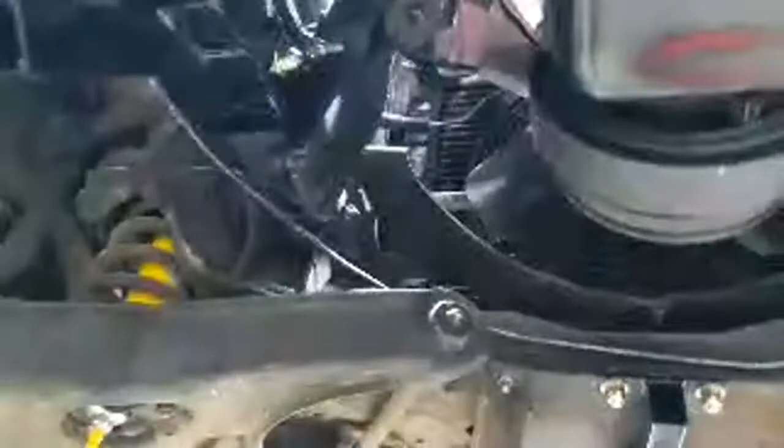Hit it more, hit it more. Okay, you can feel it when it stops turning. Yeah, I can feel the tension on it. The battery's a little low, so we'll hand crank those again at the end. Pretty strong in the last step.

All right, now the motor mount. Now how are we gonna support the engine? Unfortunately my support thingy's at the shop. Well, at least you've got one, a 2x6 right there.

Oh, and just do it on the ground? Well, we can, you got a 2x6 that's pretty close to this length. We can just lower the lift down so we know we got it, and then use the block, and then just do it.

Sure, I mean there's 4 bolts. Let's loosen a couple of them first before you even get to that point, and see how much the motor moves. Well if we just loosen them, then at least we know we're not doing that while we're out.

The 14 fits really tight. All right, bottom, right? Yep.

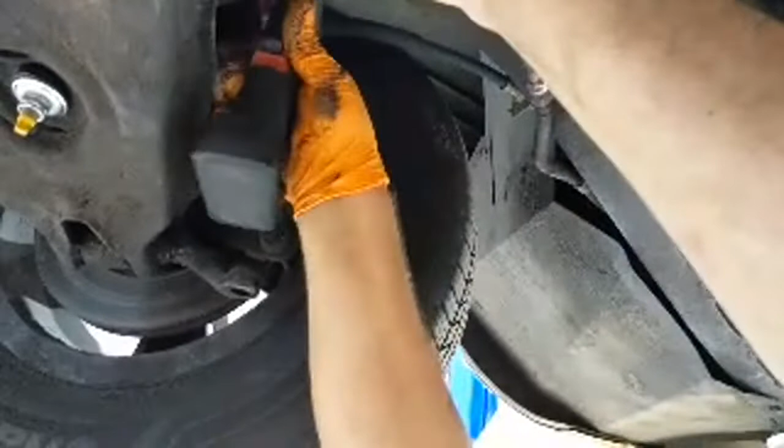I ain't gonna be able to get this one. No, not that one. No, negative, negatory, minority.

Yeah, actually nothing in this car is tight, everything comes pretty loose. The only thing that was hard to get was the tie rods.

Can I get in there with a round? I just got that one. Let's get this one too. This one's also loose now. What about the top ones? We're gonna do the top from the top.

I don't think we're gonna be... how can we support that motor without... oh, there's one of them.

Put that back on it just a little bit. Okay. Yeah, I mean it's in there. I guess we can kind of get it from here, probably easier from here than the top.

It's kind of shitty because it's got this big old shroud by the mount here. That part's gonna be kind of tough. Well yeah, that too, but just get it loose. There's this big old radiator hose in the way.

Is there nuts on that other side? How's that attached? Let me see. Oh okay, we hit those nuts from the side for sure, from the top. Yeah okay, I'll go up, hit the unlock. We're gonna go up. Unlocked.

Release. You clear? I don't want you to get your hand caught in there or something.

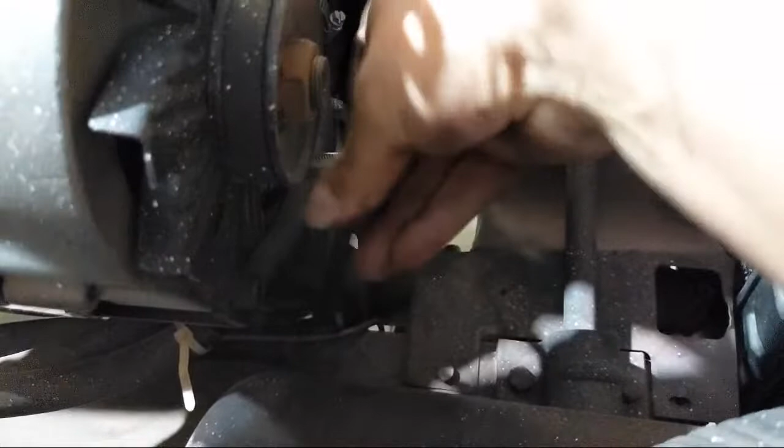Trying to think of how we could do this and hold that motor up. Well, you just go on the ground and get the jack, the black one, coming from the driver's side with the black one with the pads, and just hit 2 points on the bottom of the engine if we wanted, if we could find 2 points.

But you're right, it's got that big old pad on it, right? So we just... yeah, if we can find a spot.

Hear the rain coming down? Dude, it was coming down hard last night. Did you hear the vent above the stove? Ding! Oh no, Grace was telling me, dude, I was out. It was fucking annoying, like someone's ringing a freaking bell. I gotta go put some...

Are you still filming? Yeah, I put some Dynamat up there to keep it from going ding, ding, ding.

Why are you filming this thing? Because we're cataloging us doing this shit. Okay, these people get to see it, and you got a video of us. I mean, there's not gonna be any good SoCal Choppers or Orange County yelling at each other, veins popping out of our foreheads and swearing at each other. Your nice hat.

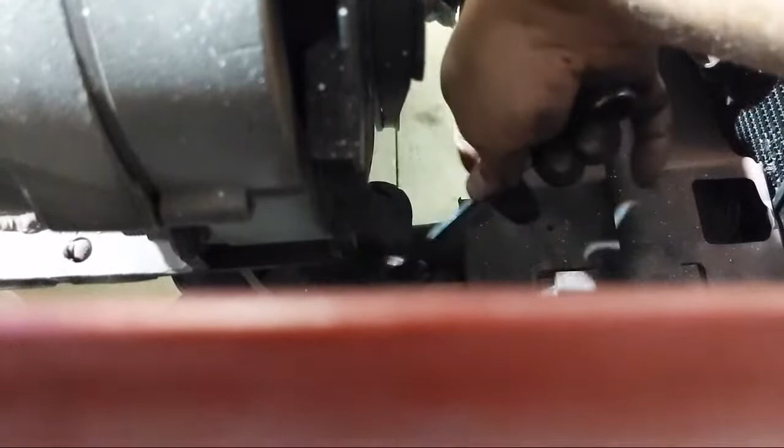If I ever pressure wash this thing, I could get rid of all that stuff, it's wax. Oh, the white wax, I think? Yeah, that's just wax. I have a pressure washer, we'll pressure wash it, as long as we don't blow into a crack and blow paint off it. Yeah, no, I'm just talking about under the hood. I'd like this pressure wash the hood, yeah. Oh yeah, I see it, all the speckles.

Okay, so all four are loose. The bottom two are like only 2 threads. The top 2 are still like a handful of threads holding it in.

So now we need to hold the bottom of it with a jack, and then I'll just slide on the creeper and... Why don't we just take the top 2 out right now? Well, the bottom 2 are basically out. Yeah, but the pin's in, right? The bolt's through the hole, it's just going to come down on the bolt. As long as it doesn't slide out. Yeah.

I'll do it now, I'll give it a shot, see if I can get it. And then when we do it, we'll put the bottom 2 in, then we'll come back and put the top 2 in. Okay, just don't let that thing fall and hurt your fingers.

This moving blanket smells nice. Huh? So this moving blanket smells nice. Want to use it as a pad? Yeah, no, I got my face buried in it right now because I'm leaning on it. It doesn't smell like anybody you know. No, although there was a period of time in my life where I would...

You would recognize it. Oh yeah, well, I was living on my friend's floor for like 6 months. But I still needed to get some ass, right? So a couple times I took a girl to my storage unit, I had all my furniture and shit in there. We'd just go hide in the unit and bang, or in the car in front of it. I'm sure they got that on video. But I was young and dumb.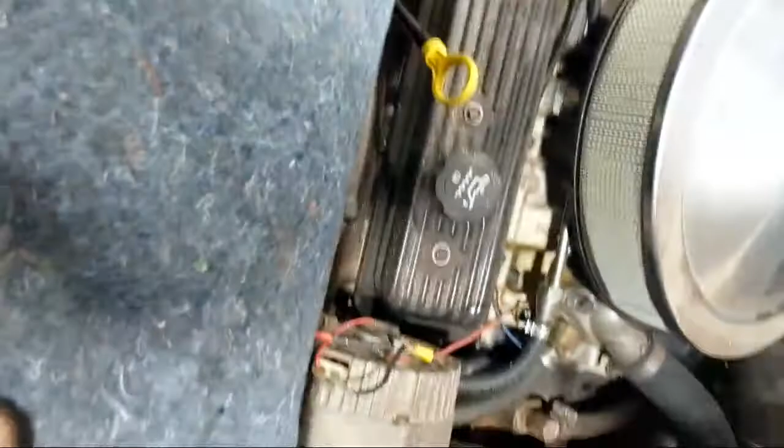Rotate device. F you, YouTube. I'll do what I want. All right, let me get my...

Yeah, I got him inside. Let me go get one. Here, all right, grab the creeper.

Bought 3 today, and this adapter thingy. This was super handy. We were fighting to get the drivetrain in the Corvette lined up. Total pain in the ass.

They're right to the engine and tranny on flexible mounts, moving, and then you got the torque tube engine that's straight, goes the whole length of the car, and you're trying to get this subframe, 4 bolts mounted, that one 4 bolts mounted, and this one pivots on this angle. And you're trying to get all these pins lined up. It was just a nightmare with one floor jack, the lift, one floor jack, and like 4 jack stands. It was not sufficient to do it.

So, which one? Me? Oh.

Oh sweet, yeah, beers are on the cart right there, right in front of you.

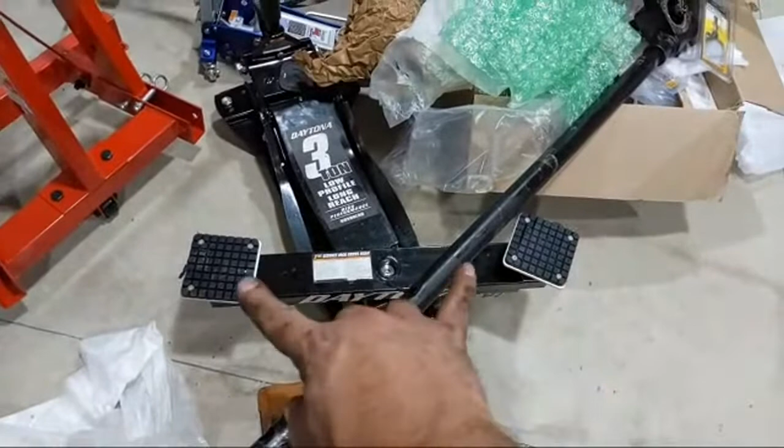And so with that, we're like, fuck it, we bought some more jacks. I bought a big one with this wide thing so that we can stick it under the cross member and use it to keep it level since it was moving around a bunch. And then got a small one, the little tiny 1.5 guy. That's great because if you've ever been under a car with jack stands and then try and put a jack under there and the jack stands are too wide, or the jack's too wide between the stands, you're just fighting with shit. This one's got a really narrow nose to it, so you can get in and reposition a stand or something, that little cute guy. And then I have the normal one there. So between those 3, it made it way easier. If I'd had those a long time ago, the whole job would have been a lot faster, taking it out and putting it in.

Yeah, would have been a lot easier. So this guy is probably what I'm going to use right now. I'm trying to use this to hold the engine up. It shouldn't take much because the engine's still attached on one side to the motor mount. Or I should say, the engine's attached on both sides, but the motor mount is still attached to the frame on one. The way the motor mount is, it's bolted to the front of the motor and suspended in front of the engine. It isn't traditional small block Chevy or LS mounting.

Sweet bike, it's my wife's. It's actually not that cheap of a bike, but it's not the disc brakes. The next step up for another $150 was like disc brakes and stuff. It's really light, it's got good hardware on it, the shifters are good. It's like a little bike.

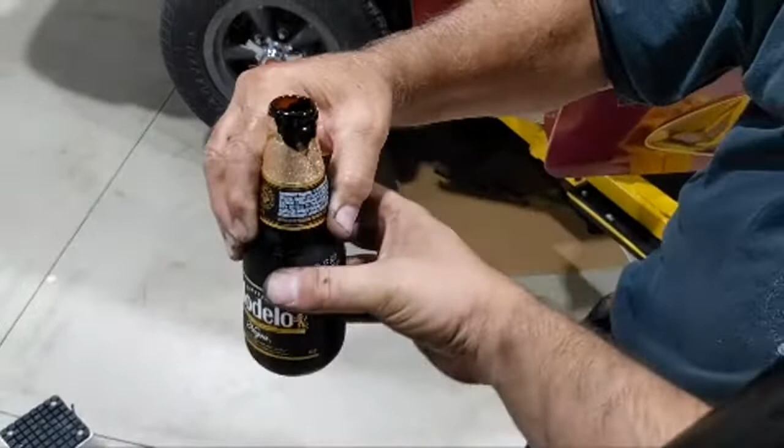Beer time. Modelo Negra. We got a rain thunderstorm, ice cold beer.

It is cold. Is that turducken ever going to thaw in the fridge this cold? Might need to move that. Are we doing pizza today or tomorrow? You need to take it out. Is pizza today or tomorrow? She asked if you wanted pizza today. Should I go ahead and... oh, they were going to do sandwiches tonight. Oh that's right, tonight's the... yeah okay, tomorrow's pizza.

We're going to do roast beef sandwiches. Tomorrow I'm making pizza from scratch. I should stream that, I do the dough and everything from scratch.

Re, mi, fa, sol, la. Dough? Yeah, gotcha.

I like doing that, I don't know if you guys... I'm a tuner, right, and so I like building fast cars and that kind of shit, but I like making bread, because dough is so... it can be easy, but it also can be intricate. And green...

You can change more or less brown sugar or salt, yeast. You can proof the yeast in water beforehand, or put it in the dry mix—there's all kinds of ways to do it that affect the outcome. And I've been trying to make the perfect pizza crust.

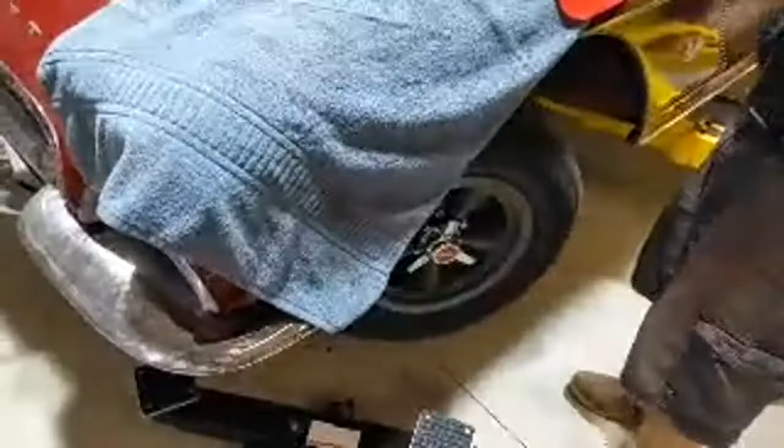My crust is really good, but it still blows up a little too much. So I think maybe I should stream my pizza making. It's like, Tom does everything—tunes cars, makes pizza? I know, I'm a nerd.

My dad's laughing at me because I like to bake.

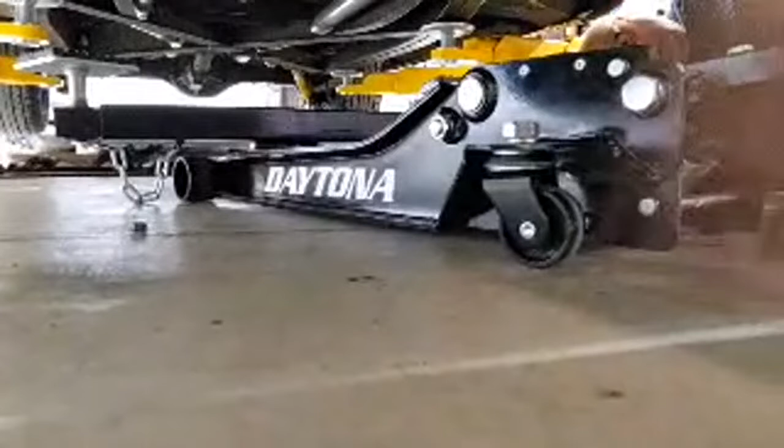No, let's go up. No, I don't want to go up. I'm going to go down then, because I got to take a look at this and make sure we're in the right spot. Oh yeah, how are you going to get in the right spot? There's nothing to grab. I don't know yet, I just got in here.

Unless, you know what we could do—use the crankshaft pulley? Just lay it up against the crankshaft pulley. There's no belt there. Will that be enough though, inside? I don't know, let's find out. It's kind of a... all right.

I mean, we could put it here. You can put it here. We're not lifting the engine, we're just supporting it, right? The mount is still attached on that side. It's only... so we can't put a block straight up into that. We could, right on the other side of the pan here.

Well, I got those big 8x8 blocks, so we stick one right here on the pan. Then we got this whole edge all the way around it to distribute the load. Get the small jack and do that.

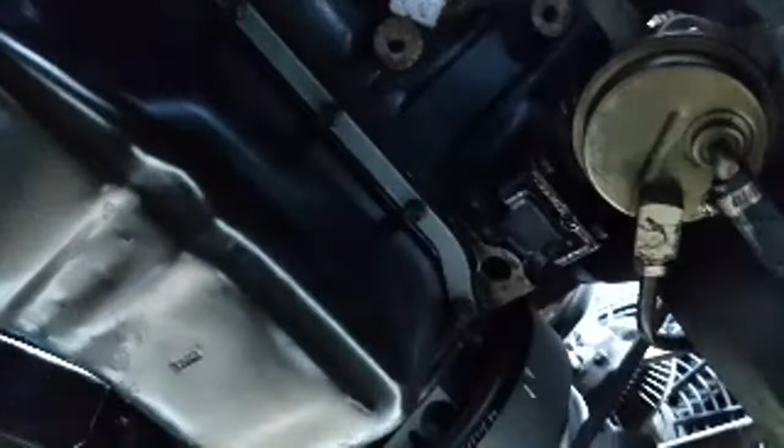I'd rather you do the pulley. Obviously the crank can hold it—the crank can hold everything else. Let's just do the pulley. Here, back it up, I'm gonna put a block right there, go straight up on the pulley. Okay, whatever you want.

Tell me where the block is. I'll go get it. The blocks are—well, there's one right behind you, on your butt. There's one right there, that's the perfect size block. That's what I'm saying, I got like three of those. And that's why I was saying, if we put it on the oil pan right here—no, I don't want to do the oil pan. Let's do the pulley.

Okay, I'll crank—let me spin this in so there's nothing else. Okay, one second, let me turn these feet in.

Do you want to do it this low to the ground? Yeah, I do, because the crank is only so tall, or this jack is only so tall. Okay, I'm on a rolly thing—I'm good, I roll around.

Do you want to take it to the extreme, to the limit? Yeah, one more, give you a little more room. Take it to the limit. How are we doing? Not good, we need another block, because these arms are so wide. Or we need another jack—we need the other jack or a different block.

Well, we got the jack here, and I know there's another block here. Alright, I got it, you okay? Hold on, yep, give me a second. Give me a sec.

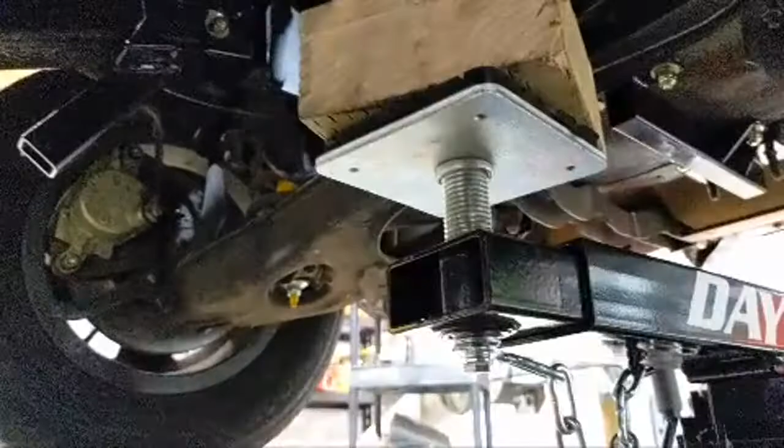There's two more, you want to go for it? Well it's too late now, you gotta go down now. I know, but that's my point—so we can lift the car up to go. No, need one more room for it. Stop, stop, we're good, we're good. Stop, stop, stop, back up. Okay, up or down? No, well the word I used was stop. Okay, okay, up, up now please. Well, stop usually means 'holy fuck.'

Well, there—and we're on it. You're on it, the car moved some. All right, I think if I meant 'holy fuck' I'd have said 'holy fuck.' You're pretty good with using your words. So, all right, now what do you need from me?

You got the bracket? No, right now I'm just trying to take the bolts out. I got the bracket, yep. Oh shit, got the bracket. You all right? Is there new bolts to put in now? I don't think—it looks maybe like there might be, yeah, they might need to be a little bit longer actually.

There's some bolts—this one is under a lot of tension, I don't know if it's up or down. Look, there's bolts here. Well, we still got to mount the rack. This is fine thread, that's probably for the rack to the mounts. Okay, and then there's shorter ones, and then there's also some silver colored ones—that's probably for the rack and pinion, because the rack and pinion is silver, right?

Is this an aftermarket fuel line? Is this an aftermarket fuel line setup? Probably. It is extremely in the way. But what's weird is that the mounting angle is completely different than the other side. It must have different mounts on both sides.

It's got like another inch, there's no threads on this thing. They must thread it on this side. Huh, well, this is a bummer. Let me see. Maybe. Maybe go this way first.

Gotta go up, woo. You need a hammer? No. Oh yeah, you got it up that time. Yeah, that's what she said.

All right, need a drift punch or something? Yes, I do, I need exactly that. Where would I find it? Well, there was a small one that we used, it's on the green box. And then there's the longer ones in the third drawer down of the big box.

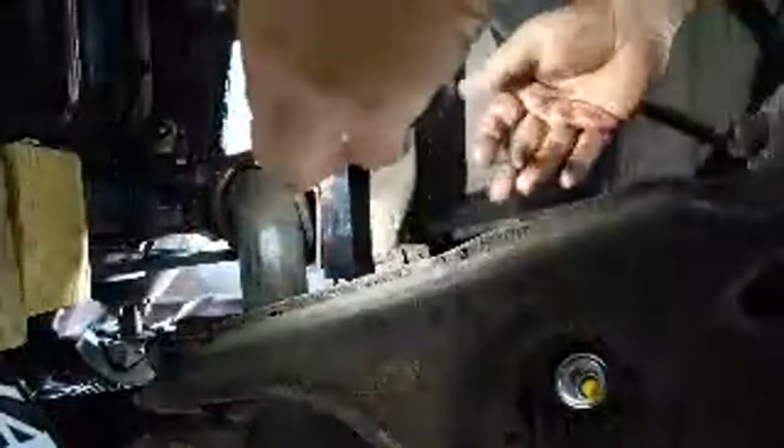Oh man, I have not had my daily dirt supplement yet, or ingestion. Let me get that.

Alright, this is definitely still too far forward. As I slide it in, it slides forward, which definitely fucks up the alignment. Oh, I see it now, those hooks up here to help you. Yeah, like right now...

You're damn close. Let me see, not down. This... see that hook thing? There's that hook thing, there it is. This thing? Hey, try to get to this top one from here.

I don't know, I'm in a hole right now, one hole. I think I should go down. There it goes, okay, one is lined up. The second one is not lined up. But one is, so I want to put a nut and a bolt in this one to see if I can keep it straight.

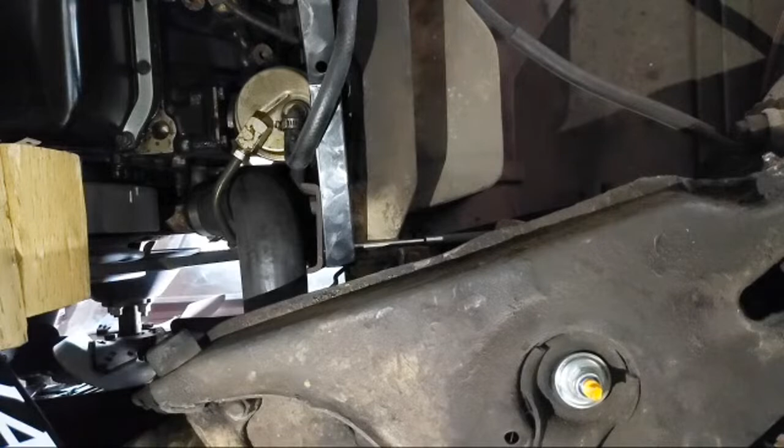Okay, we got 1 in. Get 1 bolt in this biatch. Trying to get... see, I think it needs to go down. Okay, you know what is a trick? Is it, yeah, you're in between.

I can see where you are, I think. There we go, there we go. Is that it right there? Am I through the hole? Oh, I can't see, right there? I can't tell that, I have less visibility up there of that than you do. Because if so, I could put a bolt through. I'm really close on the bottom one here. Feel it, so you need to go up. I don't know, a little more difficult.

What's up, that Igor? Igor, how you doing? What's up buddy, I hear you got hosed. I hate people. Yeah man, I don't blame you, that's some bullshit. I was telling my dad he should have kept the ticket, flew down there and kicked his ass. Yeah, but I'm too lazy for that. Well, you know, he agreed to it technically, so legally he has to abide by that. If you have it in writing, just fucking send him a letter from a lawyer and be like, you're fucked, motherfucker.

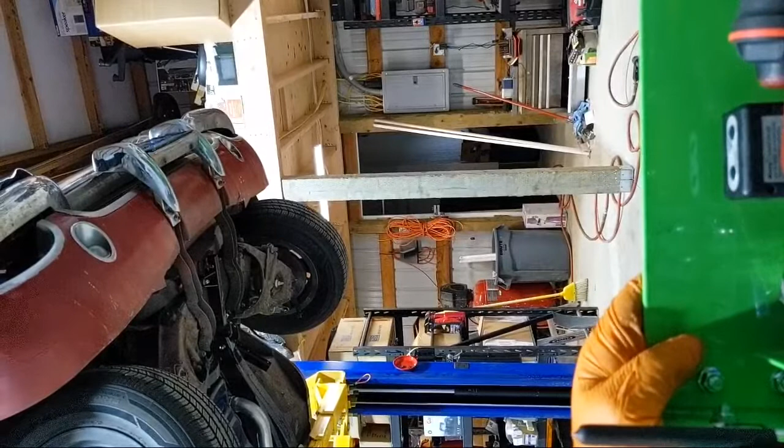Need a knife? Yes, cutter. You want a cutter? Yeah, you don't trust that you're sharpening? Here we go. What was that, Igor?

That was what we got. Weird.

There's a bracket that goes there. Look at the way the hoses come in. How are you gonna get those hoses on there? Unless they go straight up. That's how it seems it should go. Unless the hose comes in, because that's how the bracket fits the angled one. Yeah, it must go within this thing.

Let's go over it. There's a flat side there. They go over like that.

No, this goes here, I think this turns. Towards, keep going, keep going. I think it turns this way maybe? No, it definitely does not do that. Okay, then it goes, it's definitely like this right here. It's like that, even further. No, it can't be even further. Hold it, you got it? Yeah, because that mount - shit, yeah, I got it. Because that mount says that it definitely does not do that.